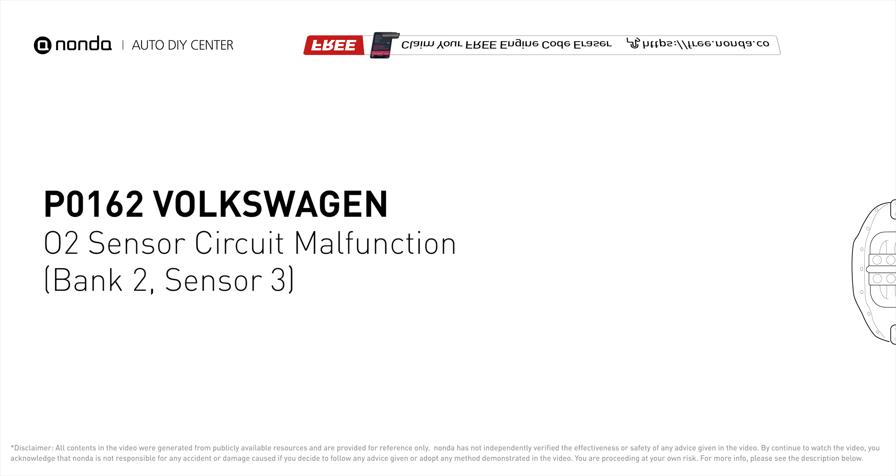Use the ZUS app to scan your vehicle and see the error code P0162. It indicates the oxygen sensor bank 2 sensor 3 fails to meet the minimum and maximum voltage limits calibrated for the ECM to see.

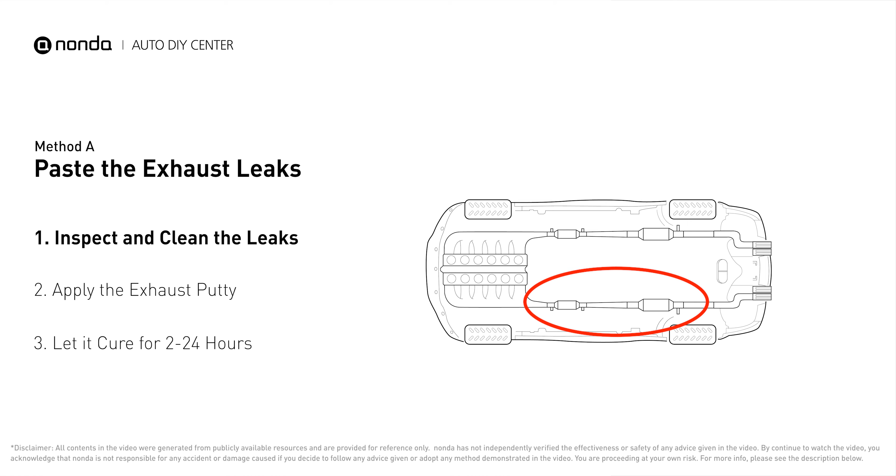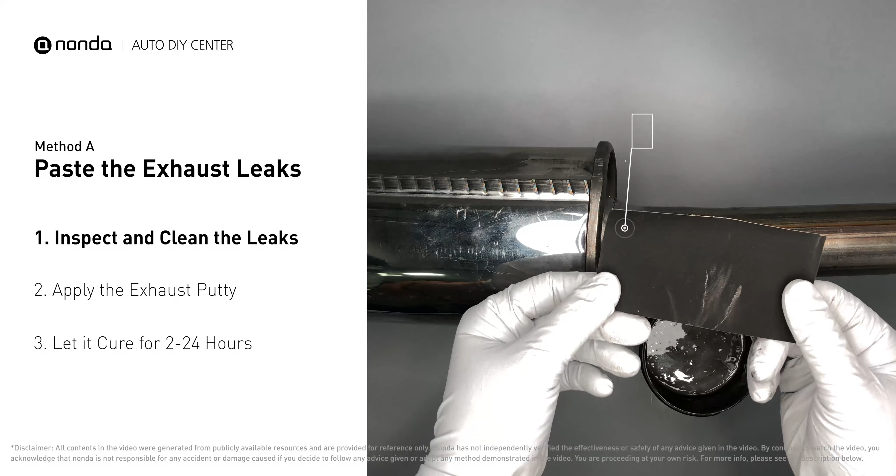Here are 3 of the most practical solutions to fix Volkswagen's P0162 error code. Method A: paste the exhaust leaks. The exhaust system begins at the engine combustion chambers and runs along the undercarriage of the vehicle, eventually ending with the visible tailpipe. If you have a leak around the corner, get some exhaust putty to seal it up. First, get sandpaper and a wet wipe to clean the leaking area for better application.

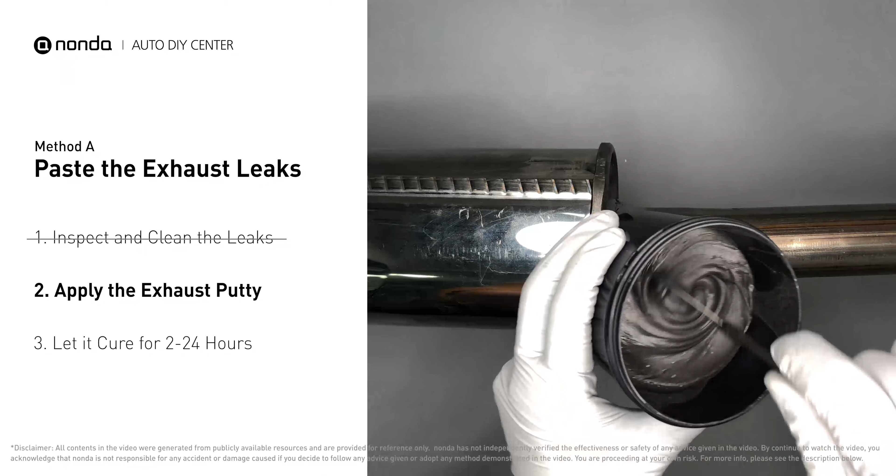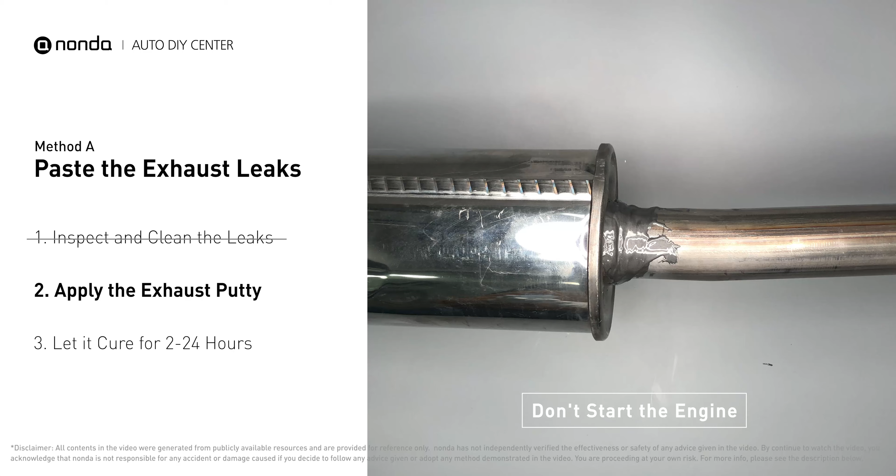Stir the paste well to activate it. Apply and press the paste to seal the leaking area. After the application, don't start the engine because the positive pressure from the exhaust will blow out the paste. Let it cure for 2 to 24 hours, depending on the external temperature. The hotter it is, the quicker it will cure. That means you can use something like a hair dryer to heat it up and make it cure faster.

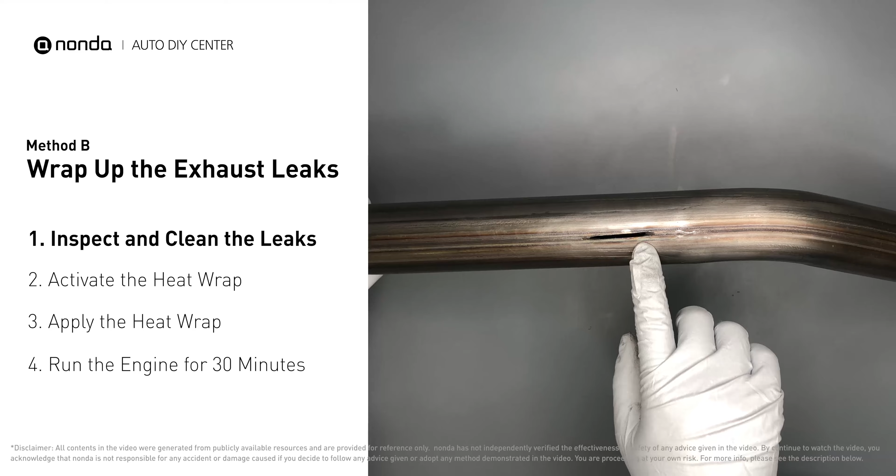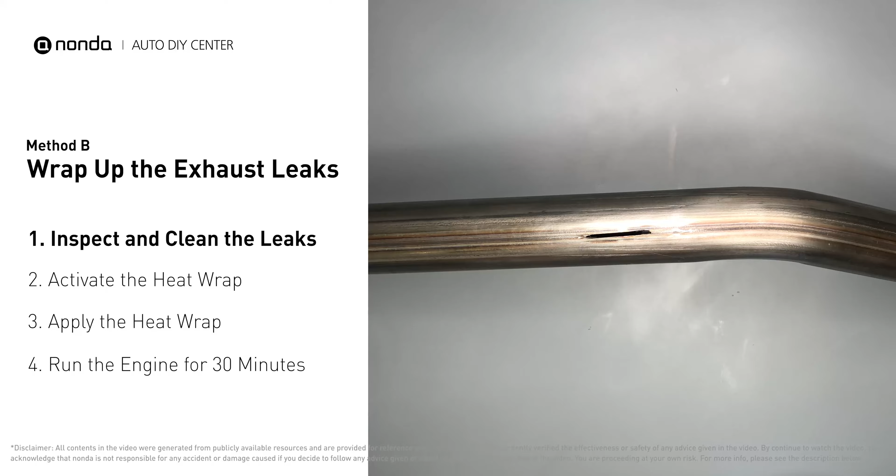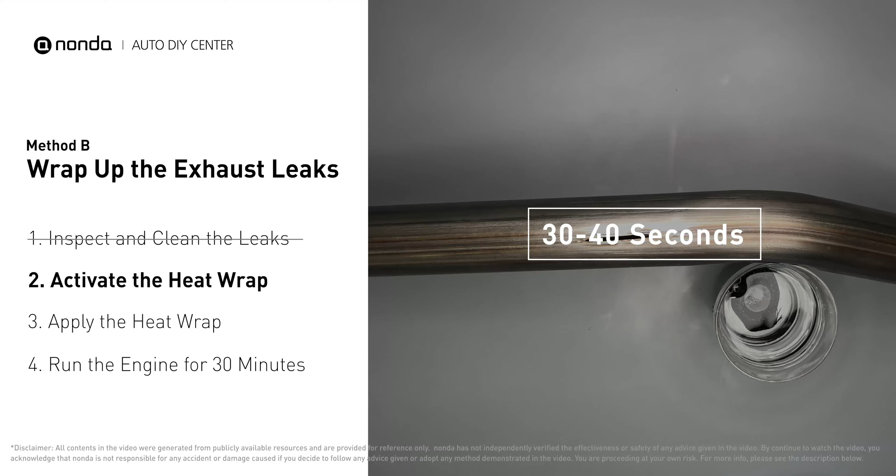Method B: wrap up the exhaust leaks. Exhaust pipes are made out of rolled steel, and there is a welded seam on them. Like this one, the seam will often rot and leak. First, get sandpaper and a wet wipe to clean the leaking area for better application. Get the heat wrap out and put it in the water for about 30 to 40 seconds to start the activation process. Then, remove it and squeeze out any excess water.

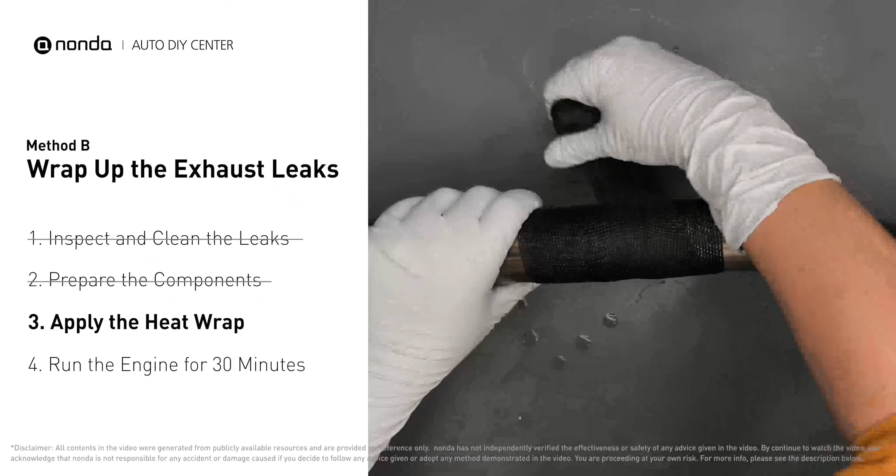Wrap it around the area and overlap it a couple of inches on each side. Repeat the process 3 or 4 times. Then squeeze it to make the resin go all through it. Start the car and let it run for 30 minutes so the heat cures it and makes a permanent fix.

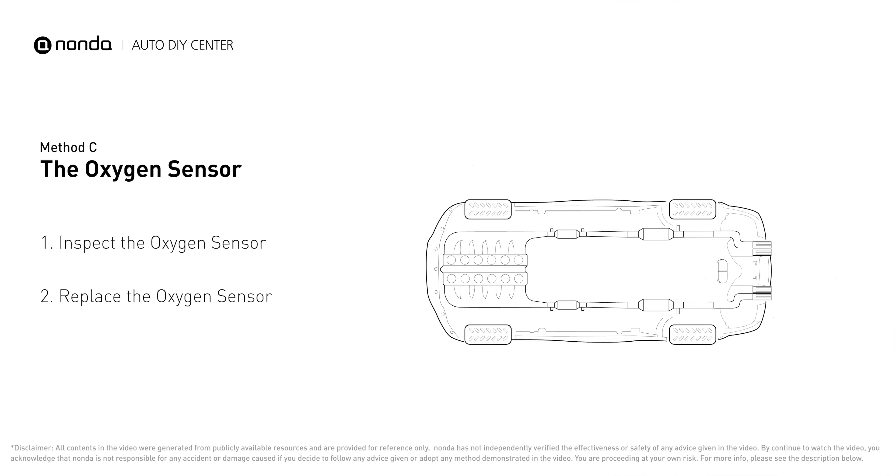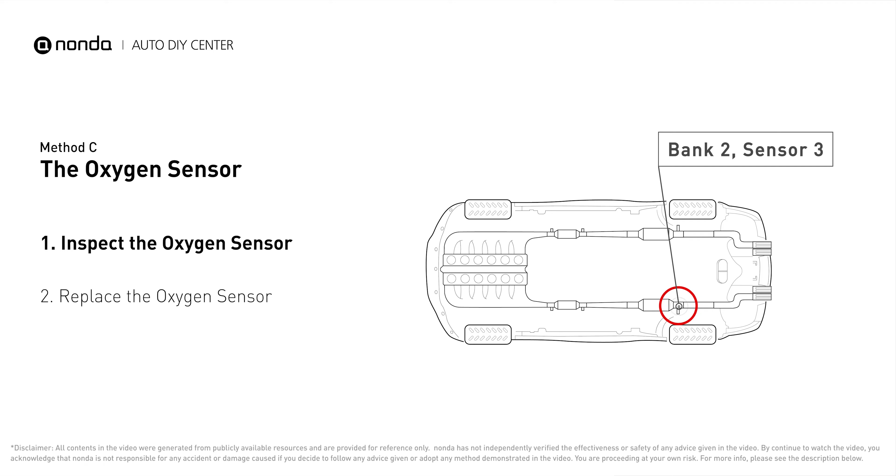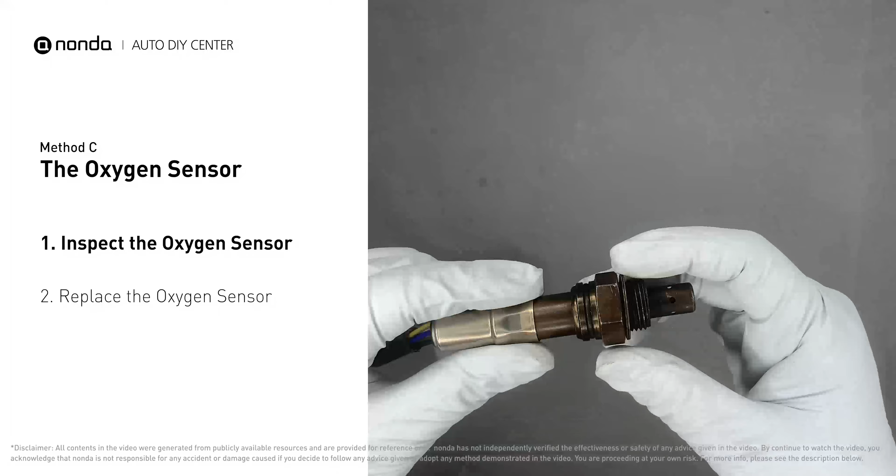Method C: the oxygen sensor. This oxygen sensor is located right after the catalytic converter. Bank 2 is on the side with the cylinder number 2. Sensor number 3 is downstream of the last catalyst in the exhaust system. Visually check the oxygen sensor's electrical connections, wire harness, and metal tabs for any damages. If damages are found, replace the oxygen sensor.

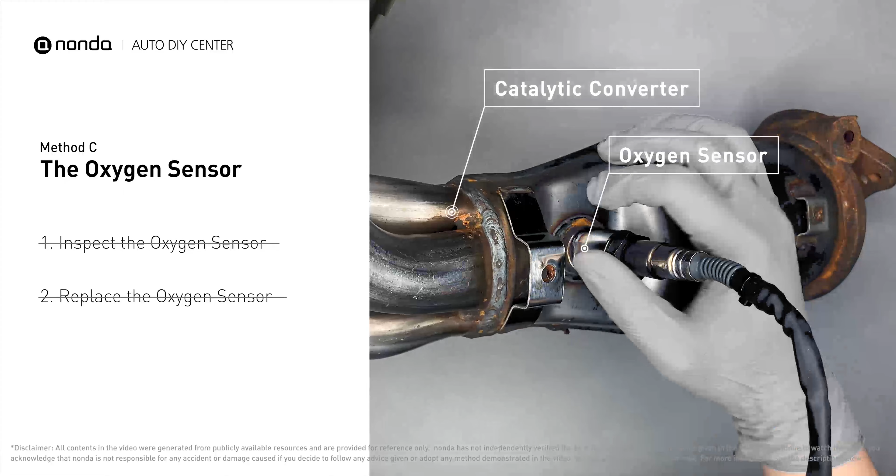So here are 3 of the most practical solutions to fix Volkswagen's P0162 error code. After the repair, you can now use the ZUS app to clear the error code. And tap the rescan button one more time to make sure everything is fine with your vehicle.